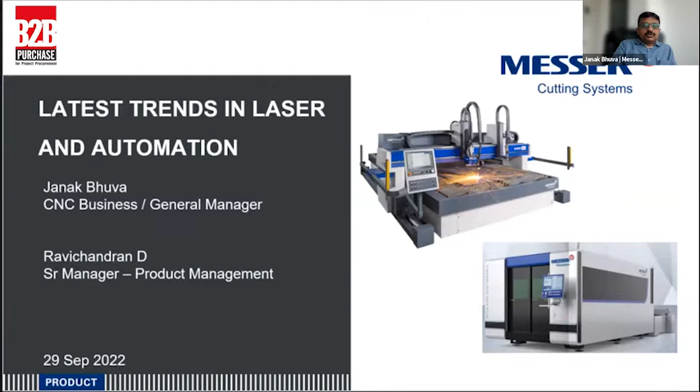So a little bit about Messer. My name is Janak Bhuva, as mentioned. I am a General Manager for the thermal cutting business in India. We have around 1,200 installations, including plasma cutting and laser cutting, all over India.

Messer is a German company. Our headquarters is in Germany, and this is a family-owned company with around 120 plus years of experience in thermal cutting. This includes oxyfuel, plasma and laser.

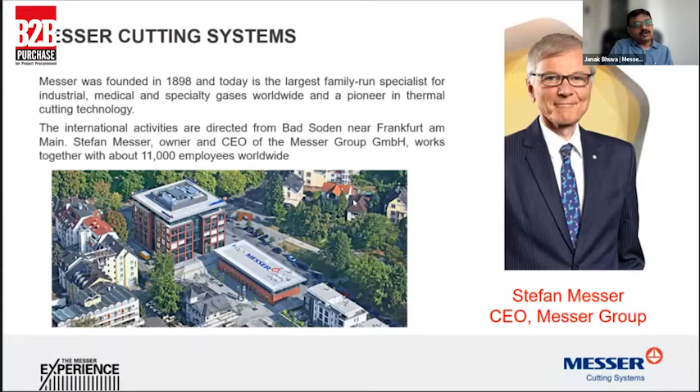We have 5 locations all over the world for the cutting business, starting with our mother plant in Germany, and also our second oldest plant in USA. Then one in Brazil, China and the latest one in India. These are all 5 plants scattered worldwide for laser cutting and plasma cutting machines.

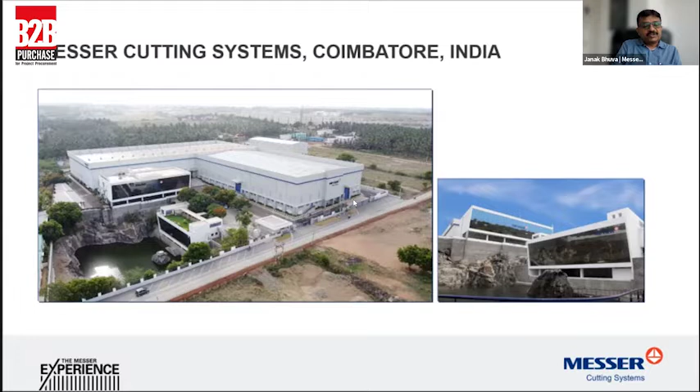As you are all aware, these are capital goods and service is very important. As Messer, we have a prime focus to provide service, and our motto is to give the customer the best service, because this kind of machine requires continuous support. So we have a huge team for providing service worldwide.

In India, we have locations across all major cities like Pune, Delhi, Calcutta. We are putting our engineers there to provide service support to our clients.

Now we talk about thermal technology. As I said, Messer Cutting is actively involved in thermal cutting machinery. This includes 3 kinds of technology. First, let's start with oxyfuel.

Everybody knows this is a very old process where we use oxygen and fuel gas, either LPG or acetylene, to cut the material, particularly mild steel. By this process, you can cut only mild steel. This is an oxidization process, and standard machines can cut up to 300 mm, and we have some machines which can cut up to 400-500 mm mild steel. This is a very old, very slow technology, but it was innovated around 120 years ago by Messer.

The second one is plasma. I would say this is mid-level technology where people use electricity and gas, passing the gases through the electricity to try to cut the material. All kinds of conductive material can be cut with plasma technology. This is a bit higher speed, but has its own limitations, like taper or small holes you cannot do. And the third one is laser.

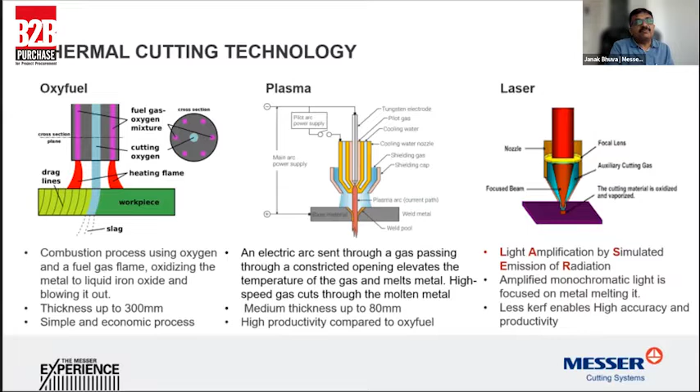So at Messer, we are in 3 technologies, which are oxyfuel, plasma and laser, and we are providing equipment for all 3 technologies. Let me give you a little insight into how these 3 processes work and what kind of benefits, advantages and disadvantages each process has.

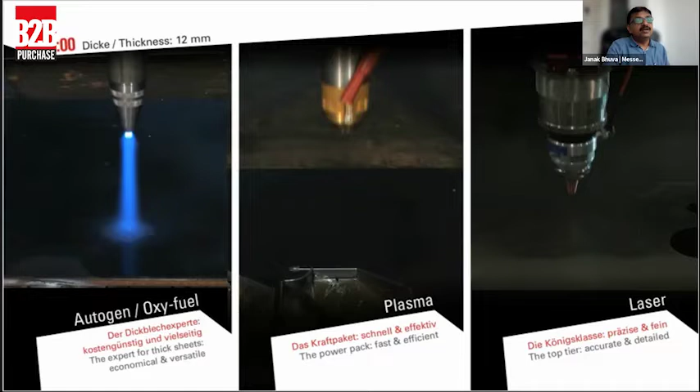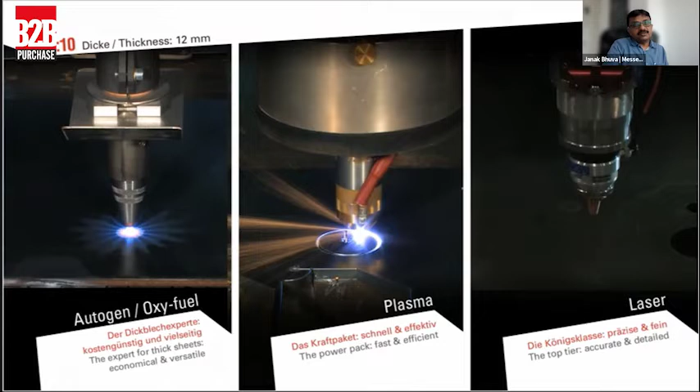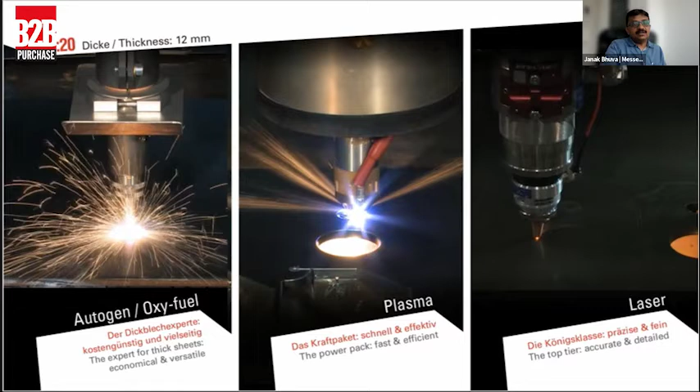This will give you a clear picture. For example, here we are trying to cut a 12 mm thickness plate with all 3 processes. You can see in this small video how fast they can pierce and cut. The first one is the oxyfuel process, where you require preheating before piercing. Second is plasma cutting, where piercing starts immediately and cutting proceeds. And the third one is laser. Laser is a very small and fine beam, with a lower kerf value, but very precision cut. So you can see the 3 cutting processes cutting the same profile with the same thickness.

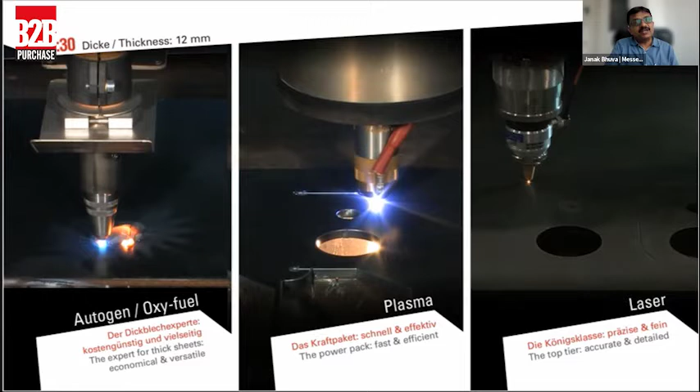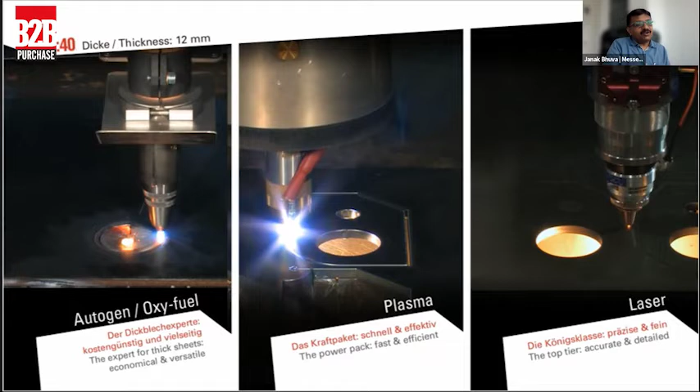You see here a lot of spatter and smoke in plasma, whereas laser has very small, almost no spatter and very little smoke, I would say. Then oxyfuel is its own way - very slow speed, and a lot of heat is generated in the oxygen process. That is the first one.

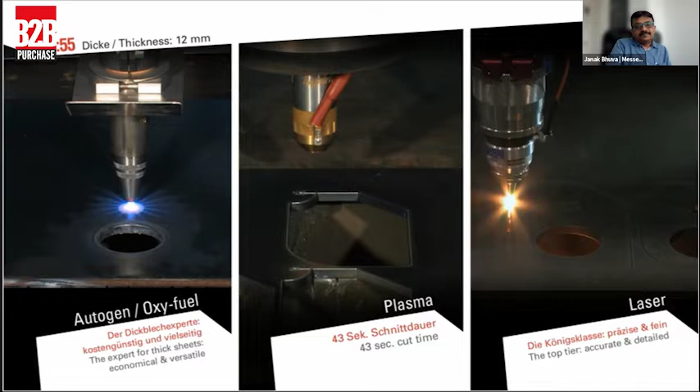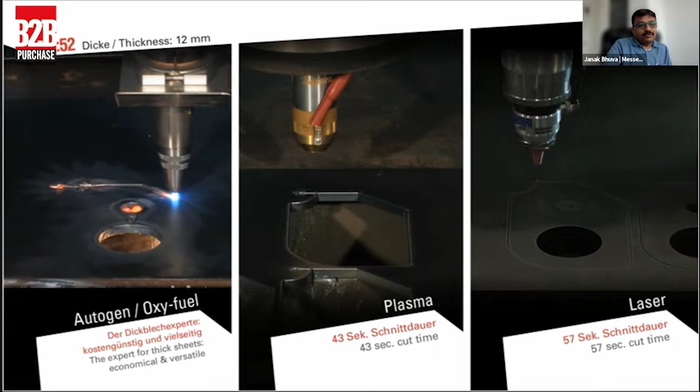You can see the plasma has cut the same profile in 43 seconds. Laser is still cutting. So laser is finished in 57 seconds. And then for oxyfuel, you can see we are just moving the video in fast mode, so you can see what time we can save here. So this is around 2.46 minutes, I would say.

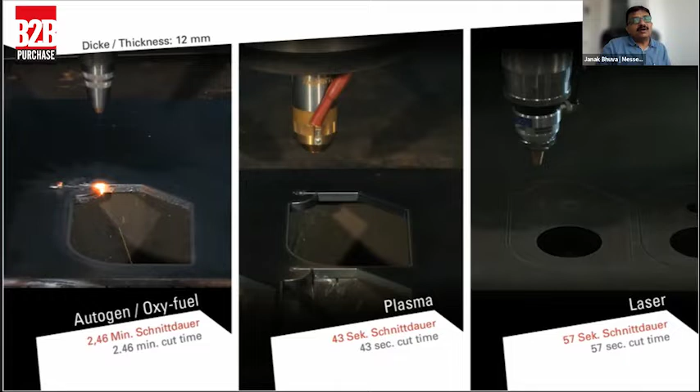So these three processes primarily give you a sense of speed and accuracy. This is basically for you to compare and decide which one is suitable for your application.

Now, the latest trend in laser technology. We will talk about laser cutting. This is the upcoming technology - I would say for the last six years it has been getting into the market and replacing plasma technology. So what is the latest trend in laser cutting technology?

It has a high power laser. Earlier when laser cutting started, fiber laser particularly and CO2 laser, people were talking about 1 kilowatt, 2 kilowatt. Now people are talking about 20 kilowatt, 30 kilowatt. So high power laser increases the performance and throughput, because when you increase the power, your thickness range can increase and speed can be increased drastically, so your productivity also will increase.

High pressure air cutting - during the corona time, a lot of people struggled to get the gases required to cut the required material. Then people started innovating, and air cutting with laser came into the picture. With air, we can cut cost effectively and also very fast, particularly for thin material.

I would say laser tube cutting meets the global requirement for structures. A lot of people have started using laser technology for tube cutting, mainly in the structural industry - lots of tubes for airport buildings, or say bridges and small buildings. You require the tube, and laser cutting gives you fine cutting in a very fast and economic way.

Large format laser machines for heavy industry application, where the plate size is 12 meters long - people have started offering lasers for gantry type machines.

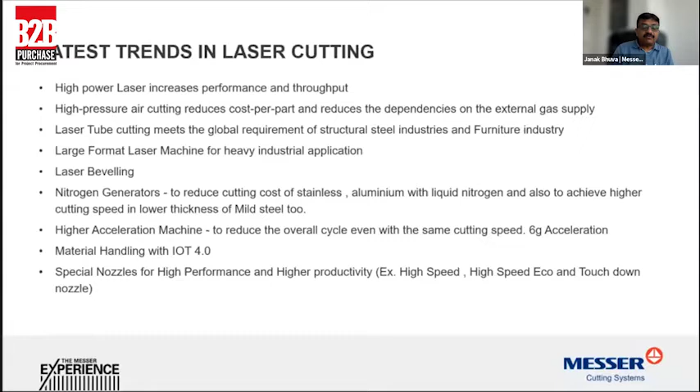It will increase your productivity. Apart from this, special nozzles for high performance and high productivity, like high speed, high speed eco, or touchdown kind of nozzle functions, people started offering in laser cutting machines. So if you summarize, improved capability in terms of higher thickness cutting, high productivity using a nitrogen generator, large format, laser bevel features, and high performance machines - these are the improved capabilities of laser machines over the last 2 to 3 years.

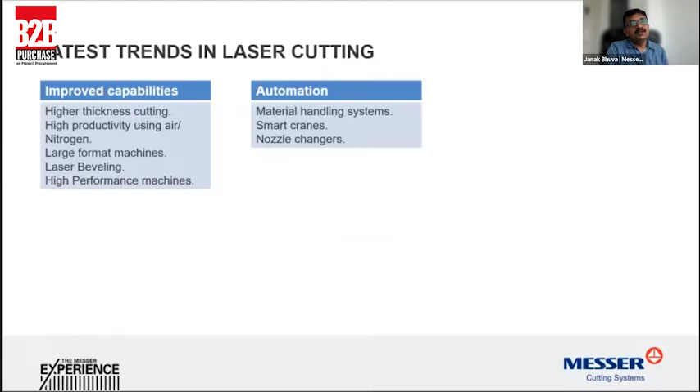Apart from this, as I said, automation for incoming and outgoing material is very important, and it plays an important role in increasing productivity or utilization of the machines. This includes material handling, smart cranes, and nozzle changers. We will talk about material handling in the second part of our presentation.

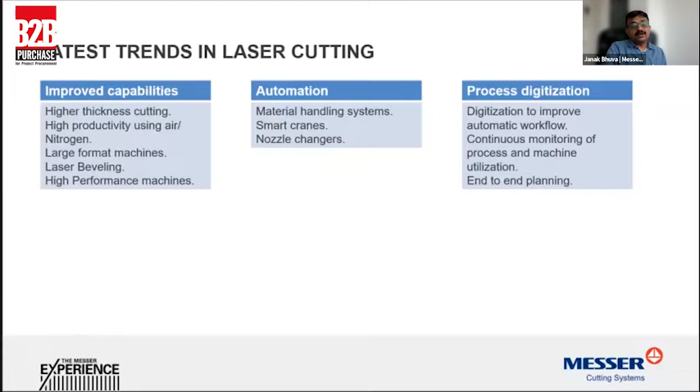Process digitalization - most machines now come with IoT functions, so you can see machine operation online and optimize your operation. You can queue jobs on the controller, and multi-process controllers come into the features. Apart from this, it can connect to your current ERP, so end-to-end planning is also possible. This kind of process digitalization allows you to control the entire process with one operator or one controller, so data is easily available for better planning and better productivity.

Apart from this, as I mentioned, higher thickness requires high power laser. Earlier people were using say below 10 mm mild steel or 6 mm SS. Now people started using, say, 25 mm MS or 16 mm SS, and that's where the 20 kilowatt and 30 kilowatt laser power sources come into the picture.

Apart from this, high productivity using air - that is a very important feature to increase the speed. When you use air, your productivity or speed will drastically increase, and that will give you high productivity.

Large format - earlier it was limited to 1.5 by 6 or 2.5 by 6 kind of laser size. Now people started offering, and particularly we at Messer also provide 30 meter, 40 meter long laser machines where you can cut large plates like 3 by 12.5 or 4 by 12.5. You can cut with large format machines with accuracy.

And this laser beveling - this is a very important function to replace the plasma bevel with laser beveling for edge preparation. High performance of the machines, as I said, speed and also the torch up-down kind of things, is very important.

We also started offering combo machines. As I said, we have certain advantages of plasma and certain advantages of laser. To combine both processes together in one machine gives you optimization of the processes. Whenever you require a small hole, you can use the laser process, and for the outer periphery you can use the plasma process. We call this the combo process, and as Messer, we started offering these kinds of machines to provide the right solution for the right application.

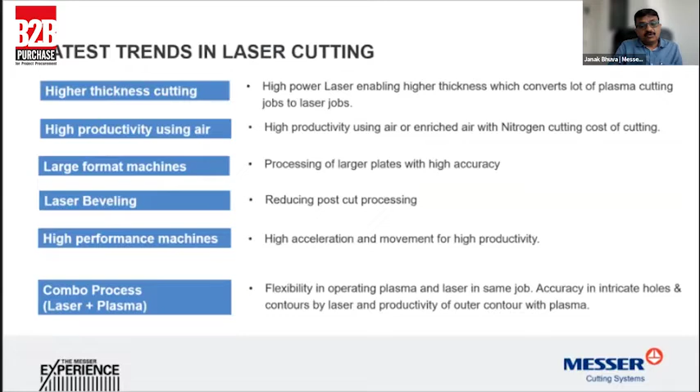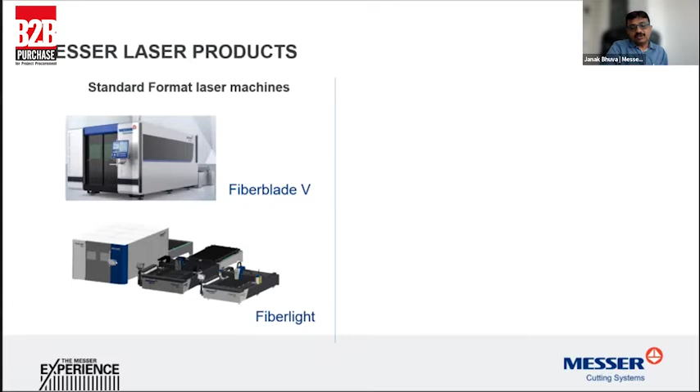As Messer, we have some products for the laser cutting machine. This is a standard format laser machine where we offer the Fiber Blade model, and Fiber Light. Fiber Light is available up to a certain kilowatt, and Fiber Blade is up to 12 kilowatt. We are providing solutions with a variety of plate sizes for the machine.

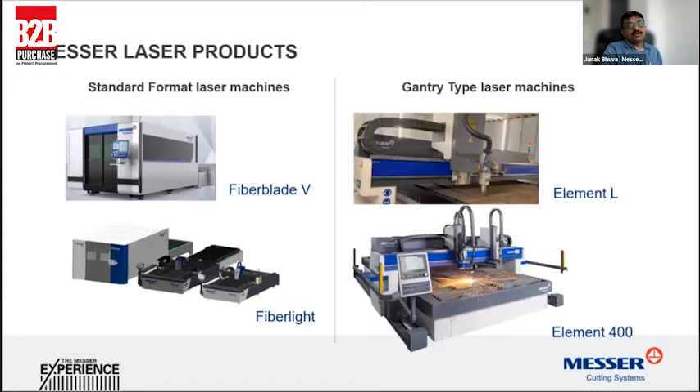Apart from this one, we have a large format machine we call Element L, which is capable of beveling, and also the Element normal machine, which can give 6 kilowatt, 8 kilowatt with large format like 30 meter length of the plate. This is standard format. I will give you the brief specification about the standard format.

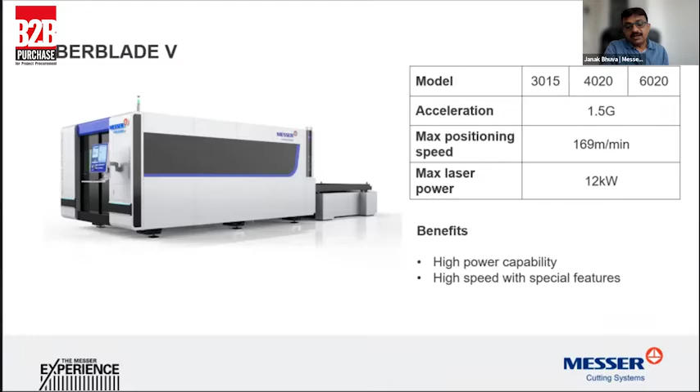This is the Fiberblade V machine, available in 3 models: 3015, 4020, 6020, with acceleration also 1.5G. Maximum positioning speed is 169 meters per minute, and we can offer up to 12 kilowatt power source. This is a small video I can show you.

This is the Fiberblade V machine. It's with the latest technology and a very high speed machine. As I said, we can provide up to 12 kilowatt.

Very good cutting quality. The advantage of laser over plasma, the biggest advantage, is when you cut particularly up to 16 mm, the kerf value is very less as compared to plasma and oxygen. That is the biggest advantage.

You can save material in today's competitive environment. You can optimize the nest in such a way that you use your total mother plate effectively, and the part to part distance can be reduced because the kerf value is very less. Overall, the efficiency of plate utilization becomes very important with laser, and it's very effective. That's why this technology is getting more and more popular, because in today's competitive environment every kg or every gram of steel is important to save, and that's where laser comes in very handy for up to 16 or 20 mm thickness of material.

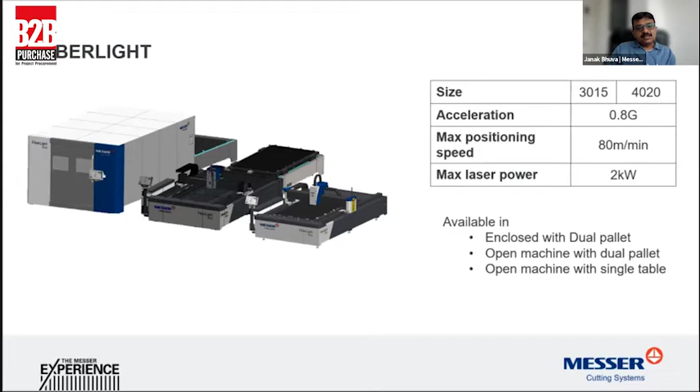So this is our second model. We call it the Fiber Light model. It's available in 3 versions: with enclosure, open gantry with pallet changer, and single table. This is a small video I will give you. This is also a very good entry level machine, up to say 12 mm or 16 mm mild steel you can do. So this is the large format laser.

This is particularly for the application of yellow goods, where big plates up to 12.5 meters can come, and they don't require very fast sheet metal kind of 2 mm or 3 mm cutting, but they require 6 mm or 8 mm in large format. This machine becomes very handy and important for them here.

This machine also comes with plasma as a combo if you want to use plasma, along with bevel facility in plasma and bevel facility of laser as well. This is a small video here.

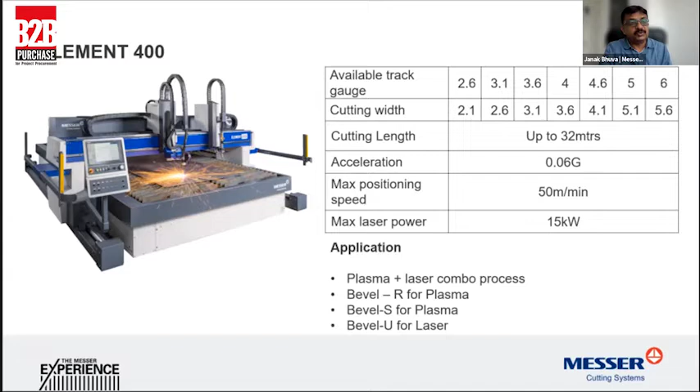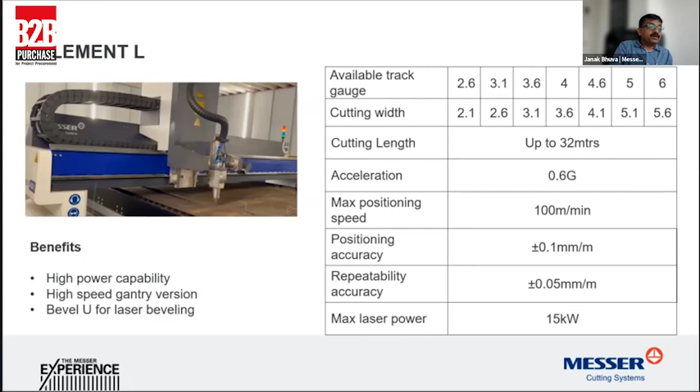This machine can also be coupled with 15 kilowatts, and it can also be supplied with a Bevel U. This is a small video I can show you.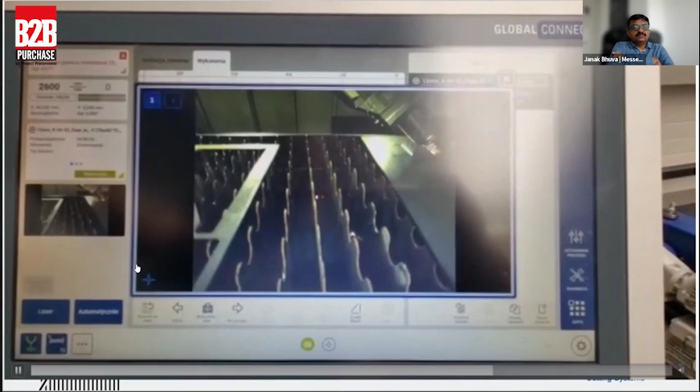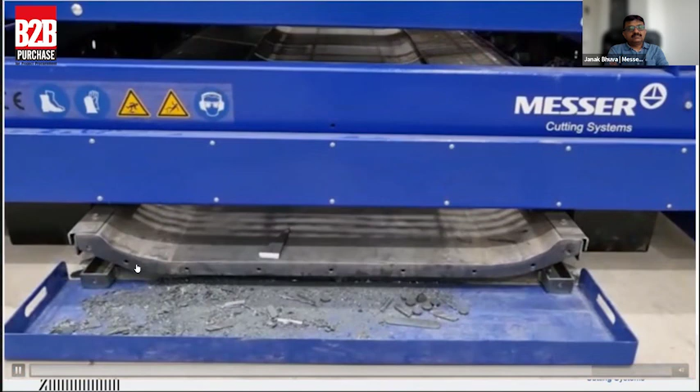So this is the video about the Element L, where you can see that we have supplied this machine with the bevel unit, and also you have seen in the last a vibration table. A variety of tables is available for unloading the materials.